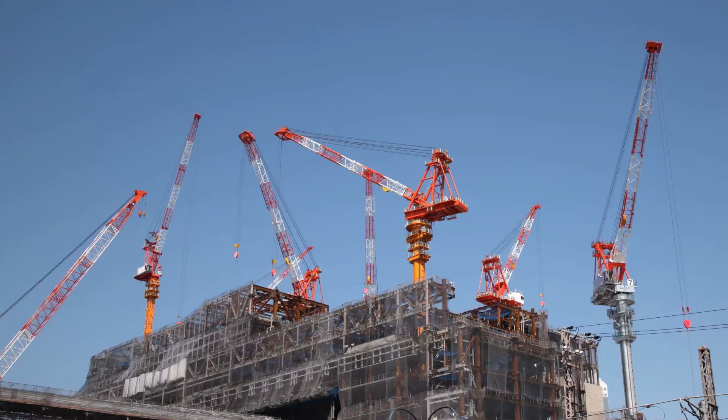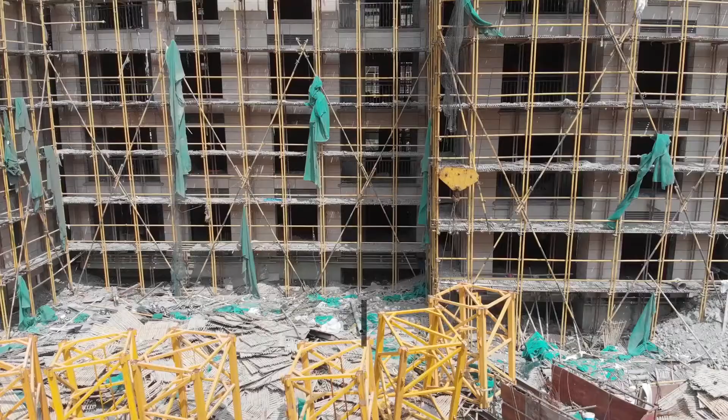Hi, today we are talking about construction and BIM. As some of you well know, construction works and procurement in the construction sector seem always closely bound together, when sector specialists want to make buildings, even infrastructure or superstructure, on time, in budget, and in the predefined quality.

Building information modeling, aka BIM, is also commonly known as the digital representation of the built environment, which started to establish its roots in the 70s and 80s.

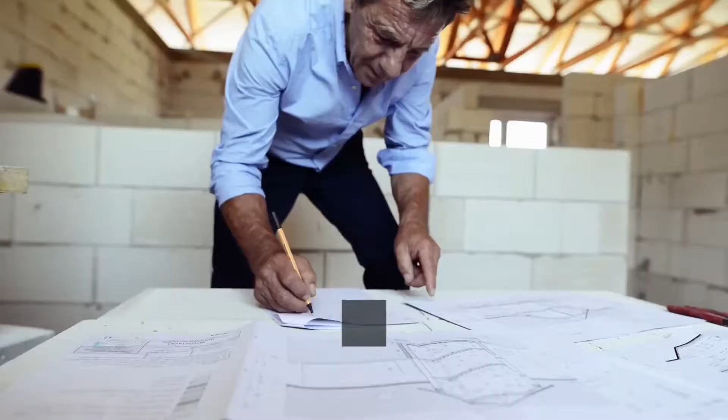We know that even procurement and construction stages have lots of unknowns in the basics. Public or private, all companies want to make right decisions when they are procuring a construction work. Understanding of 2D drawings and paper-based schedules is a very complex process and needs specializing in different aspects in the construction sector. Therefore, procurement and procurement strategies always have some problems.

In regard to these commonly known problems, BIM seems to have lots of new power to cure these problems. In this video, we will discuss some of these issues and explain some procurement and BIM strategies to make effective procurement in today's construction sector.

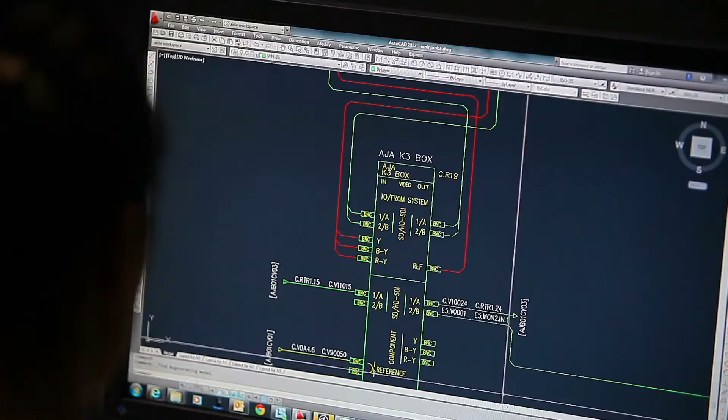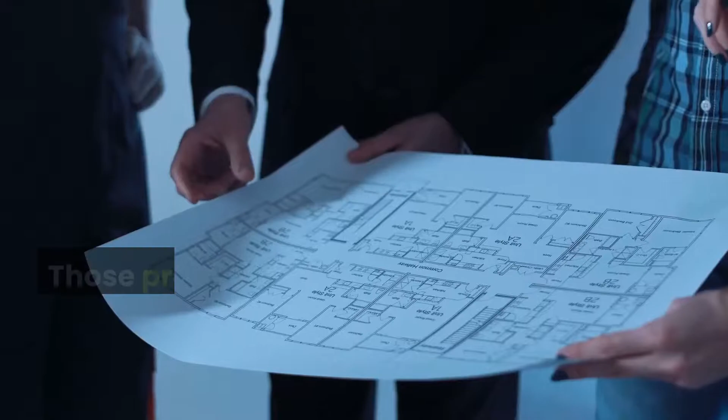As we know, our construction sector is a highly fragmented sector. Nearly all construction works are unique in their own way. Construction professionals from all over the world come together for a project and then apart from each other usually. Nearly all of the know-how gained in one project in the construction sector disappears for new coming projects. Those procurement know-hows are very critical for a company which wants to get ahead of its competitors.

Although the construction sector had some well-known estimating and procurement strategies in the past, traditional estimating and procurement strategies are not giving all of the answers to the sector. It is because they have caused a lot of uncertainties and disputes in some construction works.

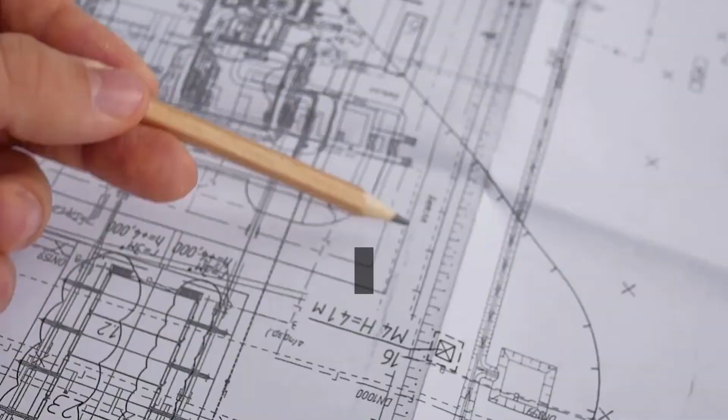We know that level of information is a very critical issue in estimating and procurement processes. Traditional 2D drawings include information which relies on its drawing inputs. Basically, they include some layer and dimension information coming from a CAD program in which they were drawn. Also, other paper-based works such as schedules get their information through 2D drawings.

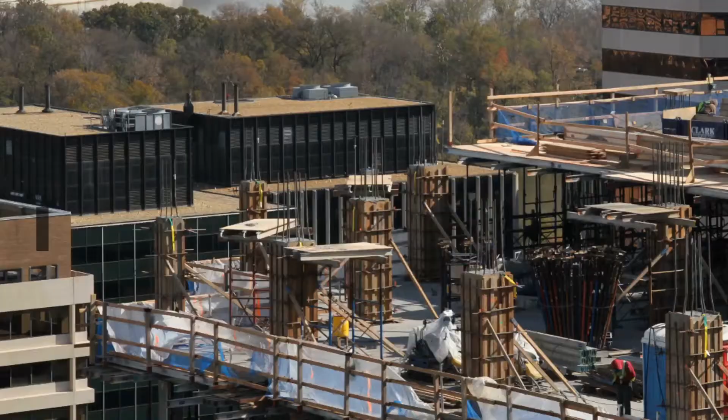Those fragmented pieces of information come from different construction sector specialists in different disciplines. Some other sector specialists also use those taking-off quantities from 2D drawings, by computer or by hand. So naturally, information is lost in every step of this process.

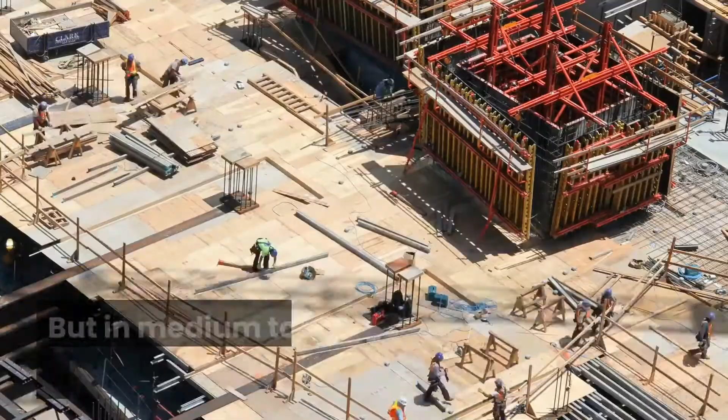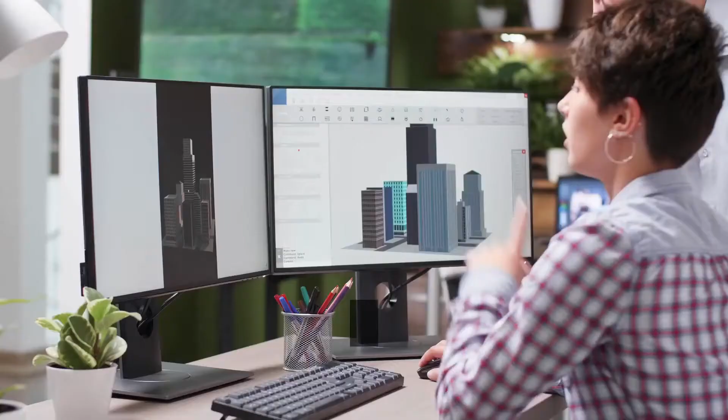In small projects, this may seem unimportant. But in medium to big scale projects, the information passing through construction teams is very huge, so correct information is a very important issue. Quality and accuracy of the level of information affects construction projects dramatically, from early estimating and procurement stages to the final acceptance process.

Unclear or wrong information may lead projects to termination of contract, which we see very commonly in today's economic environment. Another problem in the traditional production of 2D drawings is the responsibility for information.

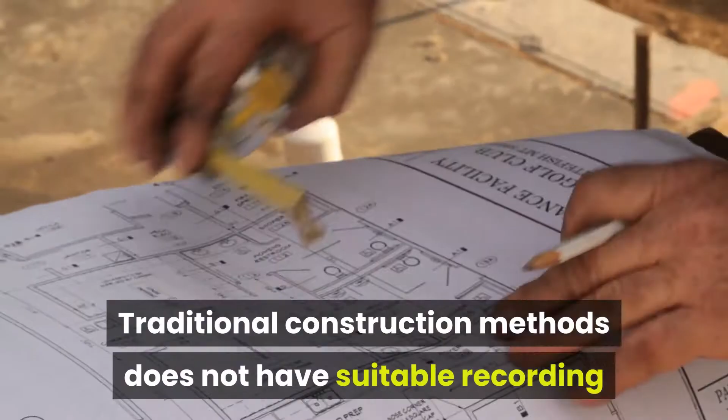A dispute over responsibility for information has been a very common issue in project management. Traditional construction methods do not have suitable recording techniques to log every change in the project stages. So generally, drawings and other documents transfer through all project participants in a less controlled and less recorded way.

If information resulting in a project error is significant, an internal audit needs to be done on the project. Because of logging errors, even these audit works can't go in depth. In conclusion, misunderstandings and confusions can be seen in every construction project based on 2D drawings.

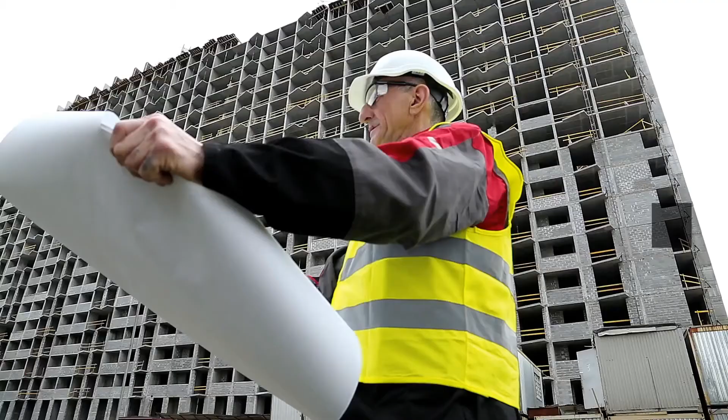Generally, authors of drawings communicate with project participants via their own drawings, done by first thinking in 3D in the author's mind and then applying that to 2D on drawings in a CAD application. In this regard, a lot of critical information is lost, and some of it, not fully reflected in the 2D drawings, prompts project participants to misunderstand or underestimate some project items.

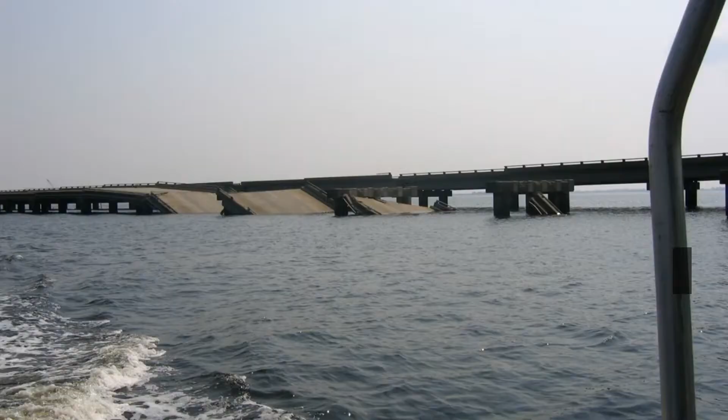Again, in this unwanted process, responsibility for the misunderstanding is not clear. On the other hand, teams in a construction company are commonly employed in different departments of a company, and in some cases companies involved in the project are different companies working under different kinds of contracts. This double jeopardy makes the project vulnerable to errors.

Although in some contracts, such as the New Engineering Contract, aka NEC, there are suitable contract types for every job involved in the project.

It is commonly seen that project team groups work in independent contracts which are not bound to each other. In general, construction service works are done by silo-based, not integrated businesses. Although numerous coordination meetings are done within intercompanies, gaps in services mostly occur when transferring information to the next service or company. Without a controlling mechanism of a well-established third-eye process, these gaps accumulate in progress and badly affect project success.

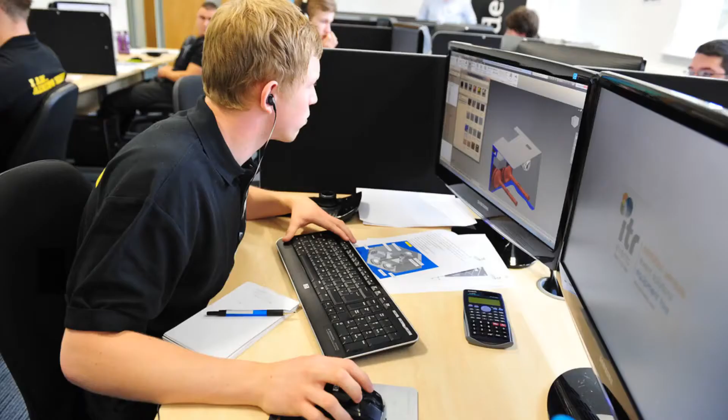The root cause for a badly managed project may be badly gathered information from project participants. It can even be the information itself which is not correct or insufficient. More or less, information seems the key element in this equation. Misinformation causes unwanted circumstances in the construction sector. So trust in correct and precise information is cardinal if you want a well-managed project.

Another problem we see in the sector is that the people involved in construction projects generally change over time due to numerous things. But we all know that the most important thing in a project is the information, which will not be affected by personal mind storage shortages.

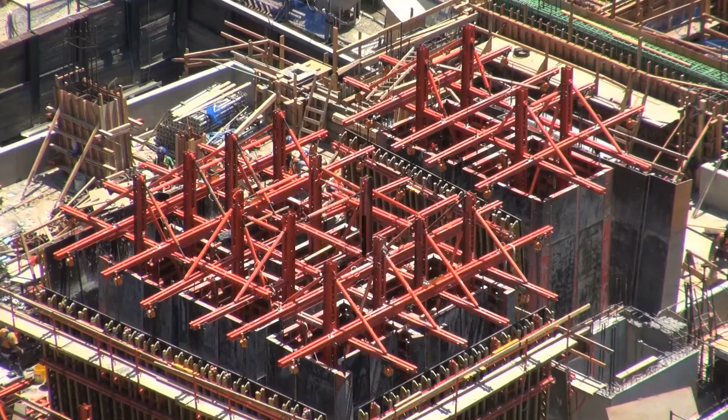In the last 30 years, we have not seen very big organizational changes in the construction industry, although some individual roles have changed and some new roles have come in as a result of computer achievements. Computers and software related to construction works have changed some roles in the industry to be more keen on technology. It is obvious that today's construction firms are eager to control lots of projects at the same time to enlarge their economic business, effectively and actively.

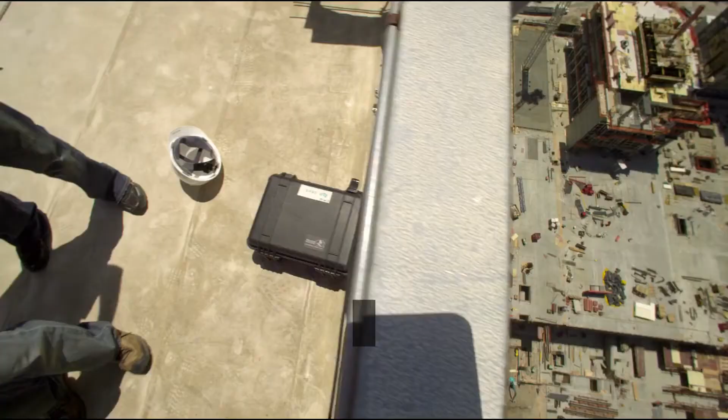In the past, it was very difficult to control and analyze ongoing projects if they were built in different locations at the same time for a company. But today's technology allows construction firms to get information from their construction sites simultaneously, from all over the world. So with the help of this technology, some project management structures need to change to compete with rival firms.

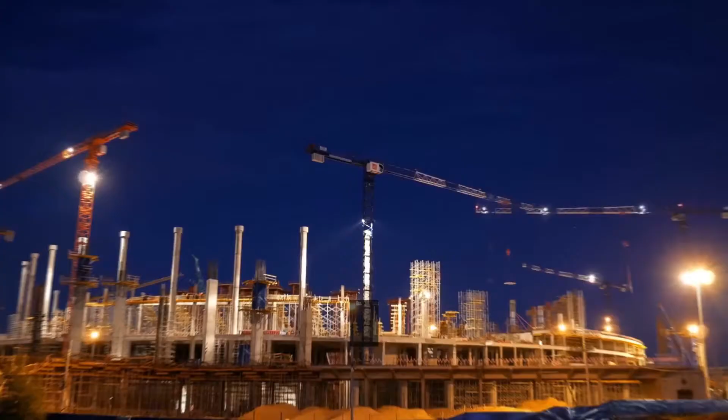We see that construction companies which have both project offices on site and a single head office at headquarters always struggle within the company. Site project offices are close to the works, so they may think they are the lonely owner of the project on behalf of their company, which may cause problems.

Meanwhile, every construction project seems unique, but the lessons learned from them are generally not unique. Some construction companies use official record books for construction works which record nearly every problem encountered in a project. Although those kinds of records would be very good supporting documents for colleagues on other jobs, because the construction sector is highly fragmented and teams join each other on a project basis, producing and transferring that kind of information between colleagues may seem like a very difficult and tedious task.

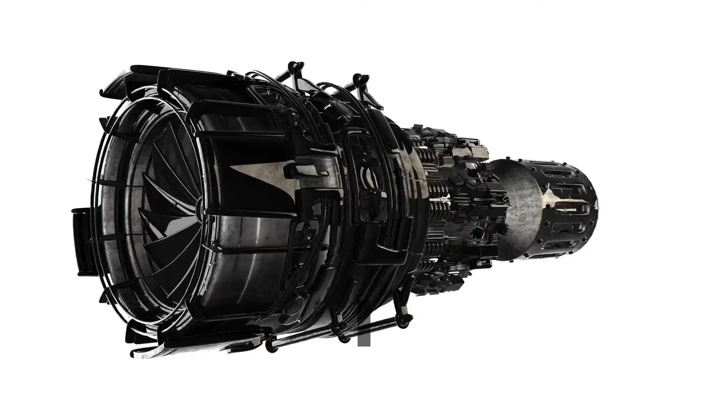It is worth mentioning that technology usage in the construction sector may fall behind industrial manufacturing such as the aerospace industry, but it is gaining enormous area of usage nowadays.

On the other hand, it seems that common problems in the construction sector are rooted in estimating and procurement methods. Modern methods in construction such as BIM and virtual design and construction (VDC) may give new solutions, dimensions, and models to these above-mentioned problems.

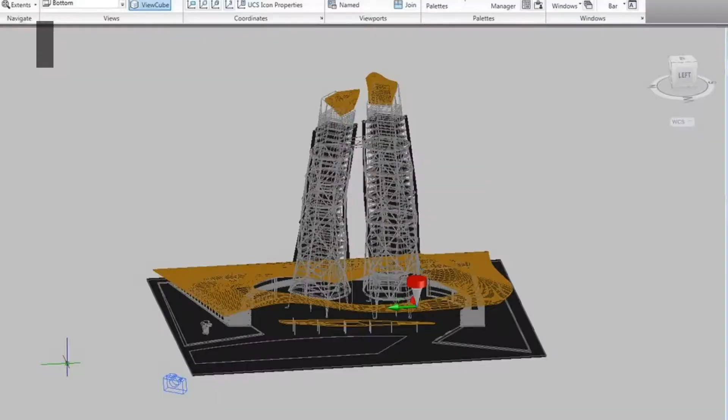Of course, BIM is not a software or computer gadget to solve all construction management problems, but it is a very well-established modeling information system which can minimize and/or wipe out construction management problems. BIM offers its users a complete 3D model which has just the truth and a lossless exchange of information. By using open and vendor-free platforms for modeling projects, BIM could give every project participant what it needs.

Lastly, it is also worth mentioning that some new procurement strategies may be seen as part of these new project delivery methods. Of course, when combined with new integrated project delivery methods, BIM seems to fill some gaps in the construction industry. If we could combine them with cloud-based computer solutions and/or blockchain technologies, procurement in construction could be very different from past applications.

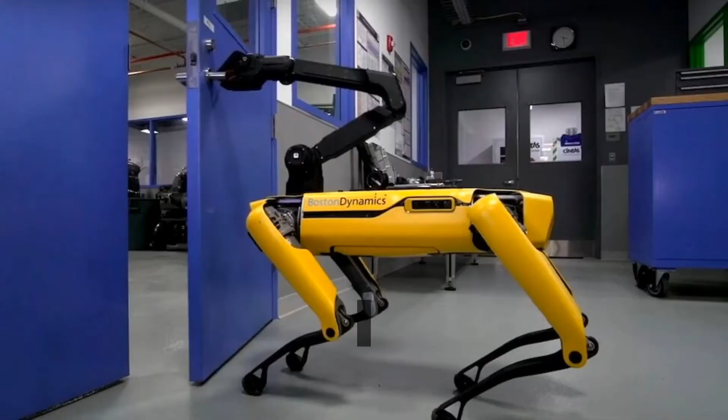BIM, cloud computing, blockchain technology, and smart contracts may be the solution to these trust problems in the construction industry, which we will cover in a different video.